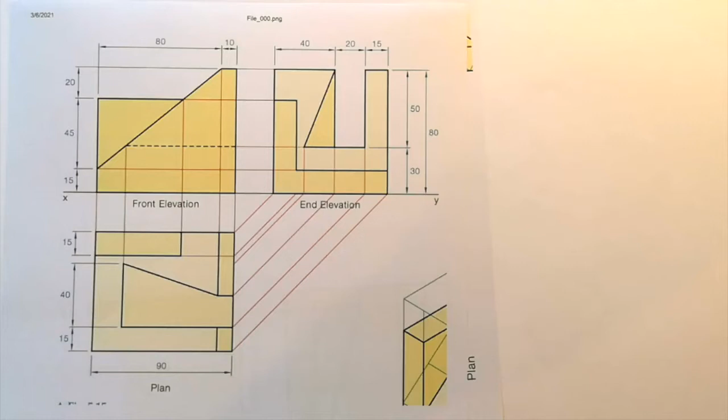Well, this drawing is a lovely little challenge for an isometric. It's got some tricky bits and some nice satisfying bits. So often you'll be given your three orthographic views. All right, load of measurements, load of bits and pieces going on.

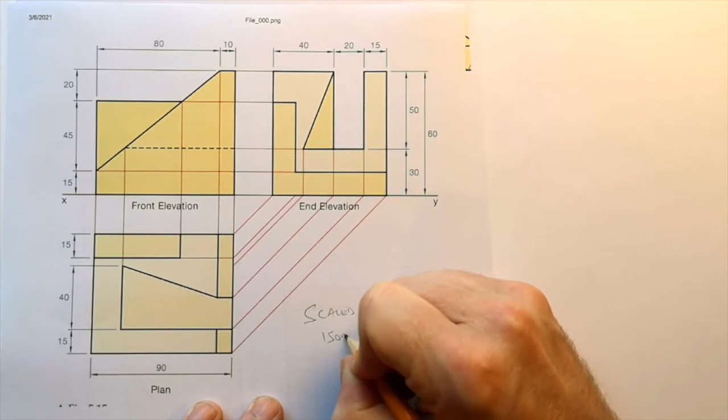So first things first, we want this as an isometric, okay, and this actually is going to be a scaled isometric. So we use the isometric scale, and I'm assuming you know what that is in this drawing. So we're going to set up our scale, set up our axes, crate it off, and go from there.

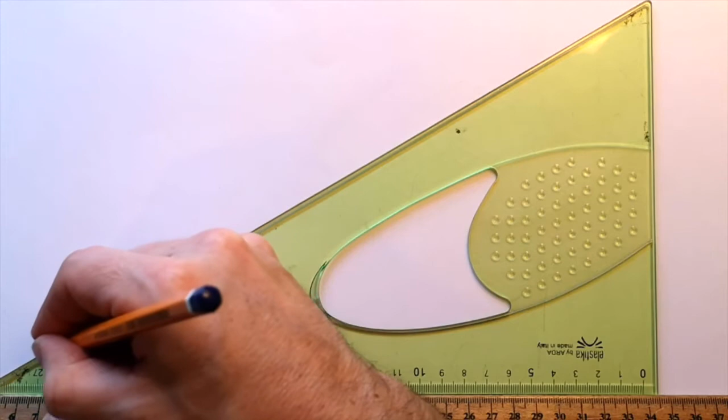Right, well, on this side of the page here, we will set up our scale. So just see, there we are. Okay, that's 30 degrees. And then we'll set this guy up. Okay, the biggest length I have in this, if I have a quick look at it, is going to be 90. So actually, I probably got over enthusiastic with my isometric scale, but that will fit in quite nicely. So that's 45 degrees for the true and 30 degrees for scaled.

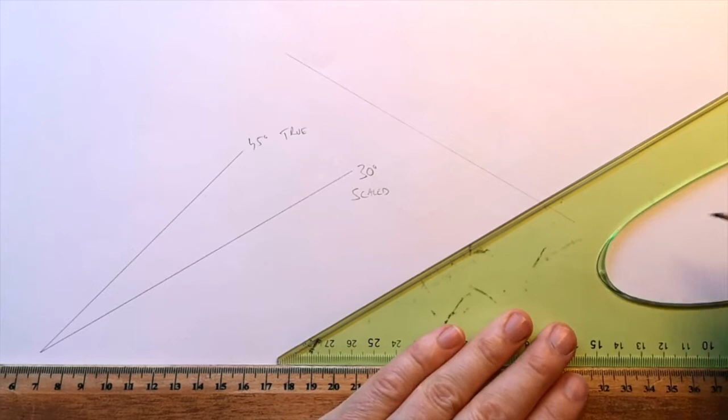Now, let's put our axes in. So we'll just see, can we squeeze these in nicely here? There we are. Okay, so this should fit in that little bit of a space, and we'll just do a bit of reorganizing to make sure we can see it.

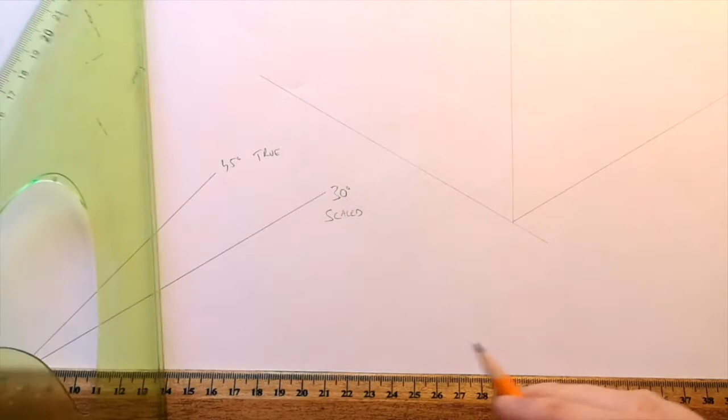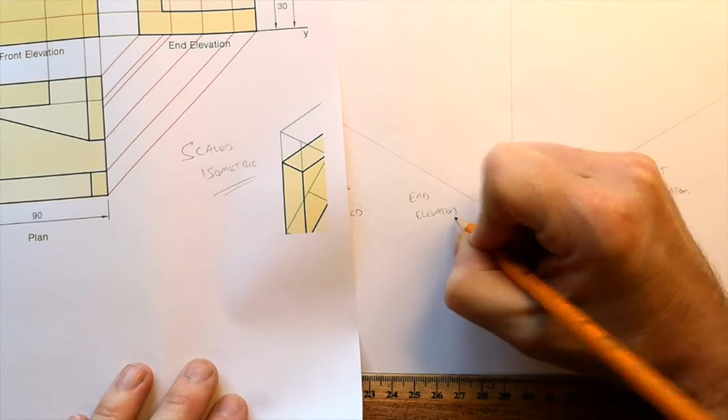Okay, so let's get our different views figured out. Well, as we're looking at this one here, this is going to be my front elevation here. And this can be my end. That's usually how we will do it. You can turn it if you have to, if it's more useful. There's not much in it in this drawing. So I'm going to leave it in this orientation.

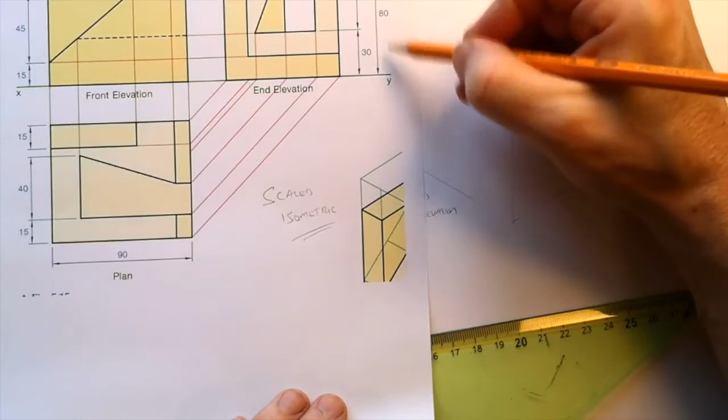Right, well, scaled 90. And we'll add 11 in a second. So let's see, we need a scaled 90. So let's measure this off. Again, I always like to number these because it saves you going back to them. I can see that it's going to be 80 tall, and adding all those up, 60, 75 across. I want to scribble that stuff down on an exam paper so you can see it. There we go. 75 and 80. So let's get those measurements in, and we'll build up our crate.

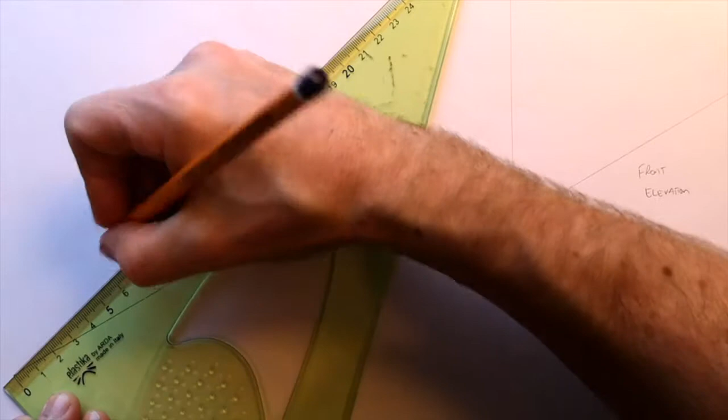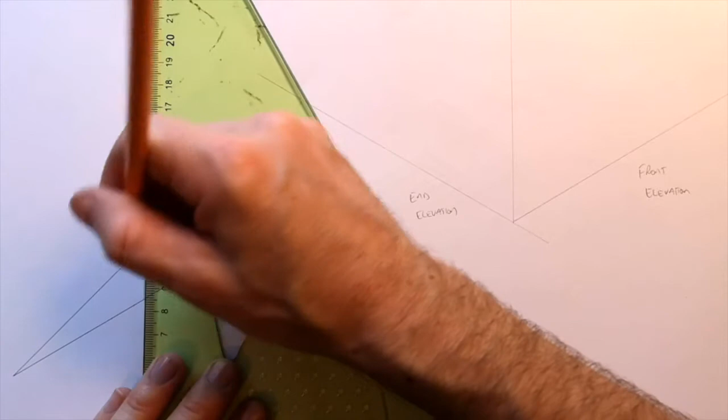Now, on a drawing like this, I always like to think about what's my little warning signs when things can go wrong. And this one is, it's not super obvious if you mixed up these ones. Okay, if it was a very long rectangular drawing or something like that, you'd see it if you made a mistake. Here you won't. So we just need to be careful that we set these views up correctly. All right, so we'll just take a little bit more time than I would on some drawings. So we'll double check. The front is 90. Okay, grand, let's get that down.

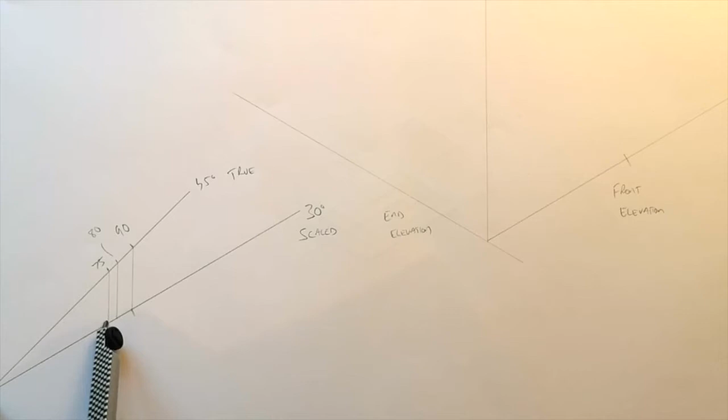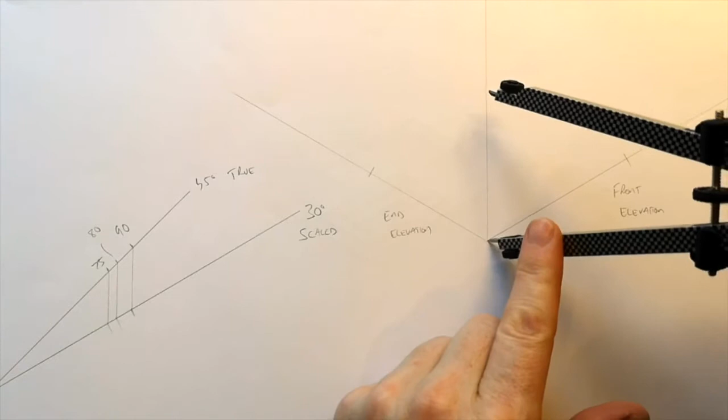All right, the end elevation is a 75. There it is there. And it's 80 high. Okay, so we'll crate this off. Now a little tip is you can rub out the rest of this axis above the highest point because it only kind of gets in the way at the top. So let's see, can we do this? Right, there we go.

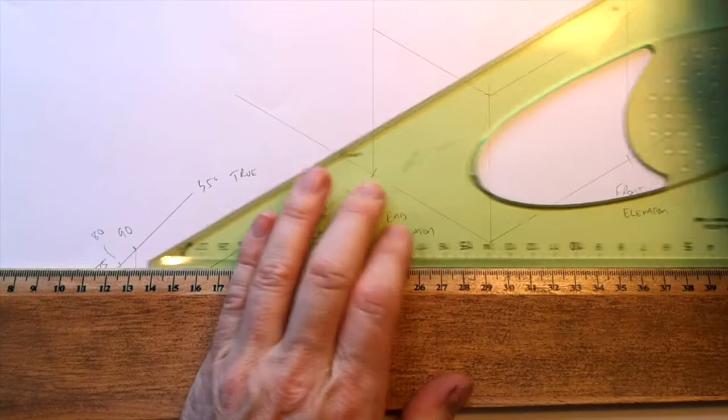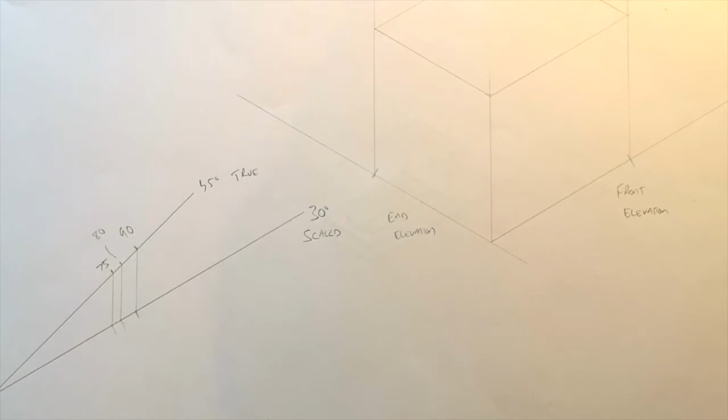Now, see the way we're using this, I'm only measuring these things once each time. We can do the whole thing there. So now we're just going to do a small bit of camera readjustment, get ourselves back on track so we can see everything as we go. Now that's a little bit better.

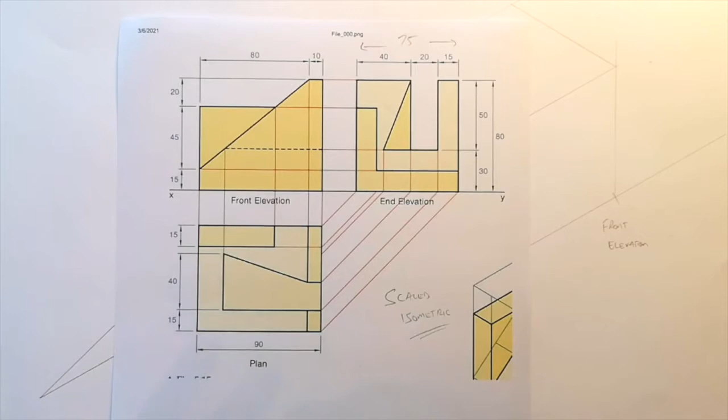Okay, so remember I said in a drawing like this, I see mistakes looming because of the shape of it if I began to turn things around. And the way I like to approach these things is rather than give myself a clap across the ear if I make a mistake, I will assume I make mistakes and I try to work around them. So what I want to do is I want to get this big triangular section drawn first, because then it'll be really obvious which way this is facing. So I need a 15 and a 10 and then we just connect the dots. So let's go and measure these guys.

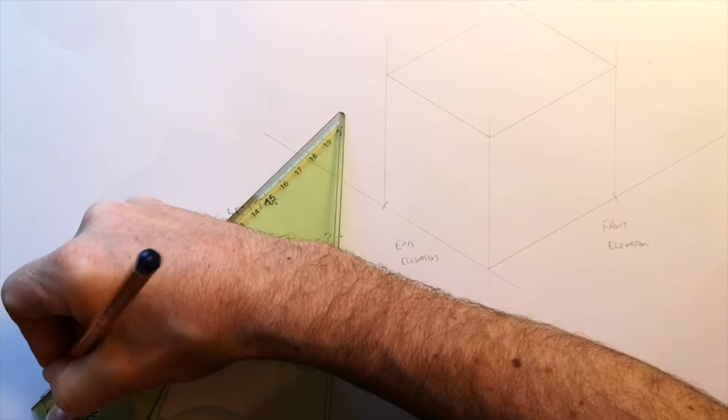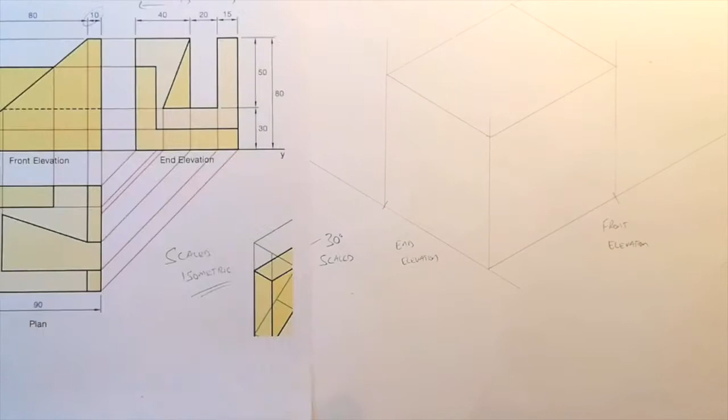There's 10 and there's 15. Okay, so we'll scale them. Now 10 is really fiddly and annoying. So for the 10 we're going to measure it, and you'll notice if you do this a bit, 10 scales to actually about 8. Alright, so 10 is, just check, this little one here at the top, so there we are. I don't really want my head to be where the camera is, but that should do us right there. Okay, so make a little mark there. And we need to come up by 15, and this of course we'll do with a compass.

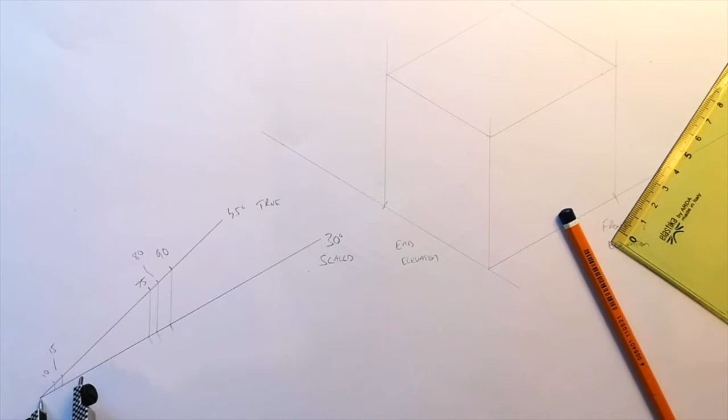And it's worth thinking, if you really hate the little measurements and they're annoying you, of course the other way to do this would have been that was 90. So I could have just used my 80 there, which in hindsight was probably a better idea. But hey, we all get it done in the end. Now, that's a lovely clean face. I'm going to put that in heavy, so it helps me orientate myself in my mind. There we go. You may be far more organized than I am and not make all these silly mistakes, but that to me is my challenge, and I know it's kind of my weakness, and once I know it, it's no big deal. We work around it.

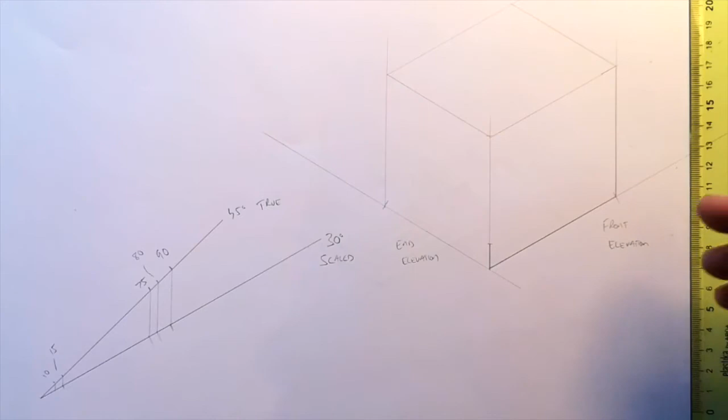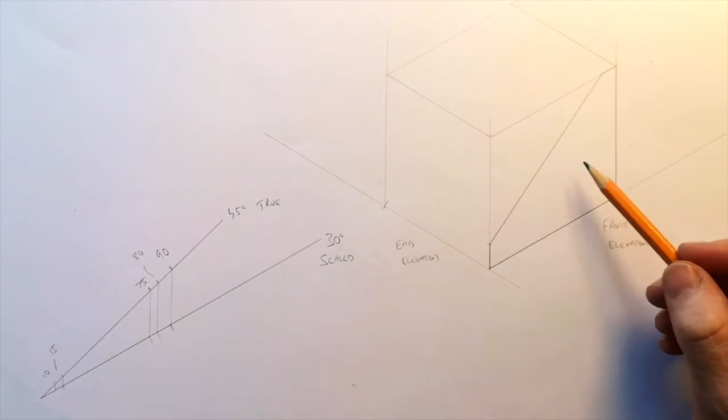Now, what about the angle? Well, whenever we do angles, okay, start to the end. What angle is that? Who knows? You can figure it out pretty easily, but I'm not really bothered. I know where it starts, I know where it ends. I'm going to connect the dots. Okay, and there we go. So now I have that edge in. Okay, this drawing is going to be much harder for me to go wrong at this stage, so this is a good move.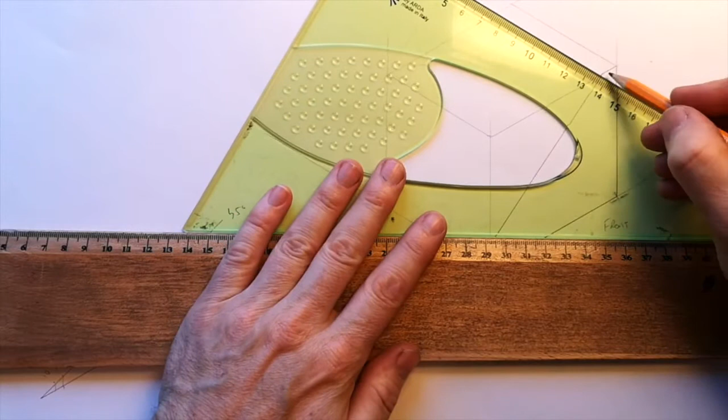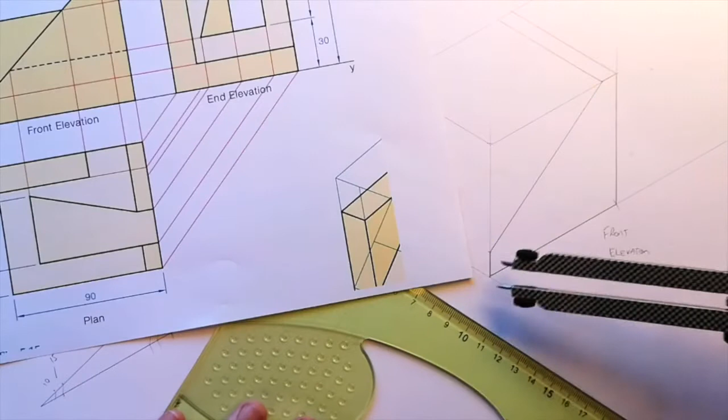Now, what do we do next? Usually I would say begin to pick away at the things that are easiest. All right, so I can see that that 10 mil line continues across the top a bit, so we'll stick that in. And the more easy things you get done, the harder stuff begins to get more manageable, and there are some tricky bits in this drawing. Now there's a gap in that, so that's why I've left it as a construction line. Let's see where else we might go. Well, if I came back by whatever that distance is, oh, there it is, 40 mil, okay, and a 15. So actually, I even have my compass set to 15 at the moment for that top one. So I'll use this again. There we go. And then we'll have to do a 40. So let's just solve this 15 for the moment.

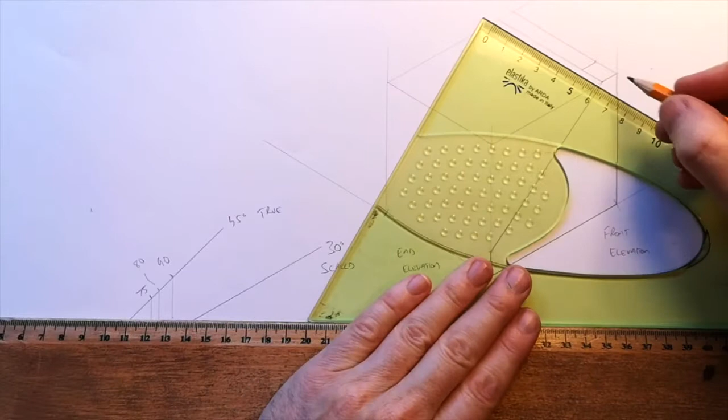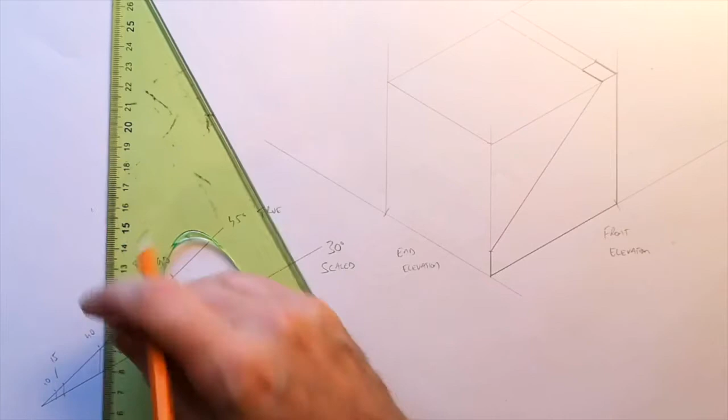And I like the ones on top because you know what you can see. You don't have to worry about, is this visible, is it hidden, where is it going to go? These ones are clearly, completely visible. So there's the top. Now we do have to add a 40 in for the other one. There it is. Remember, it doesn't actually matter what order you do these in. Just make your life easy. But if you're trying to figure out where to go next, just pick something that looks manageable and do it. There's my 40. That comes in from there. Again, I'm only doing one because I can just project it across.

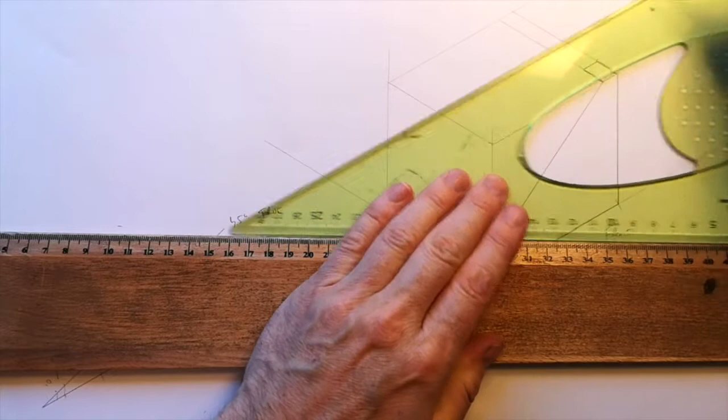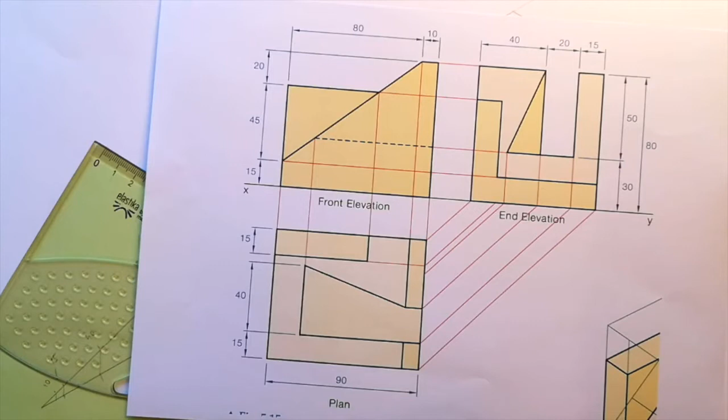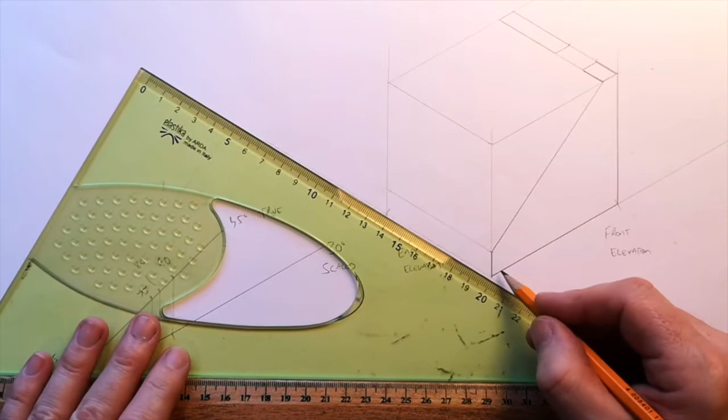Okay, grand. So there's my top two pieces. This is coming together. Well, where will we go next? Well, it's kind of up to you, but again, the next easiest thing that I would see is this L in the end elevation. Okay, that looks fairly handy. I have the 15 already. Do I know this height? And there it is, 15 again. Okay, so let's see, can we get that done? That just goes across here, so that's easy. Project across. And then we need a 15. So we'll go back and get this guy.

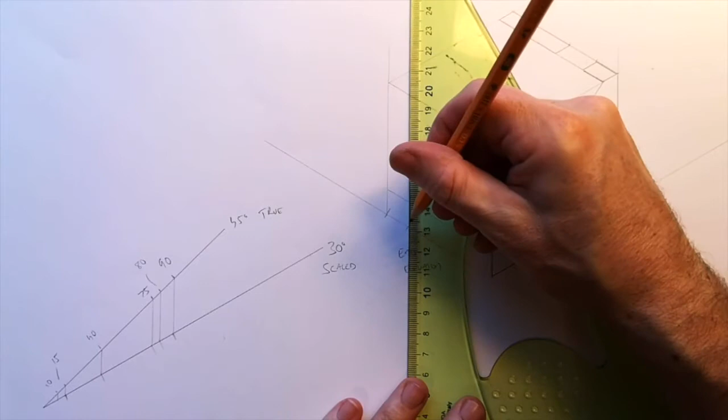I always draw it just on the page to make sure I'm actually contacting correctly. And you can measure off any of the axes, but I'll do it there. That goes up like that. Now it doesn't go the whole height, so again, let's go back and have a look at our drawing. And that is going to go up by 60. Right, add this to our scale.

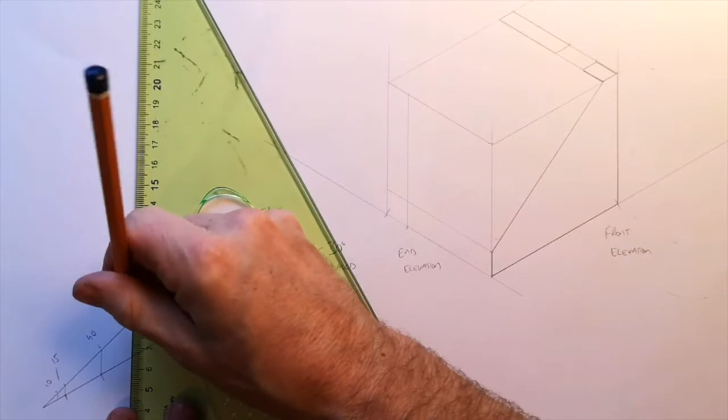And you see I could of course have added a scale of 45 to the 15 that I have, but the bigger it is, the lower the margin for error. So that's why I'll always go with the bigger measurement where I can. Now let's pop that in there. So again, we can put this guy in heavy.

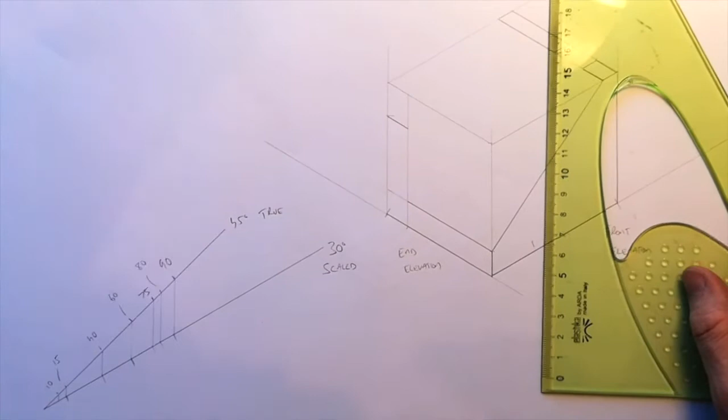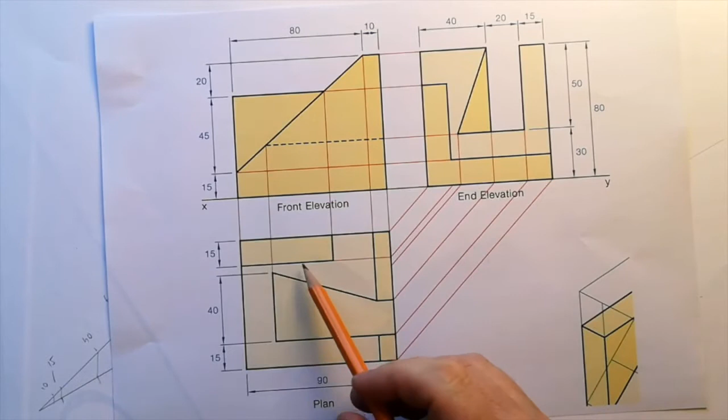Okay, try to avoid little double lines like that there. Now, where next? What have we got? So, I could come back until this point, but do I know where this point is? That's not super obvious yet. Okay, that looks hard, so let's not do it.

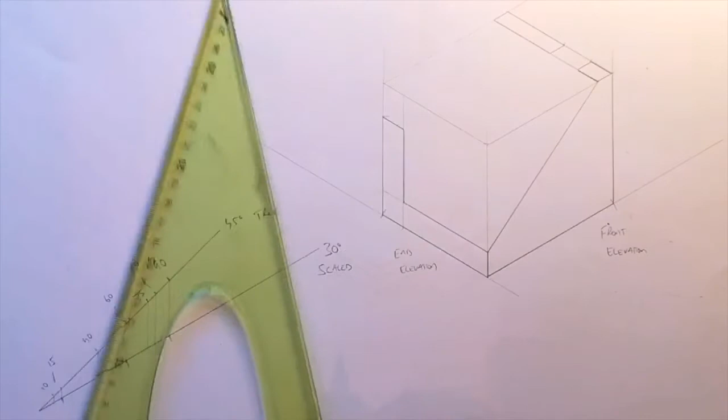What else can I begin to put together? I wouldn't mind knowing where some of these points are. So maybe we might try and see where this line that goes across is. So we know it's 30 up. Right. Let's go do that. 30 scale, and off we go.

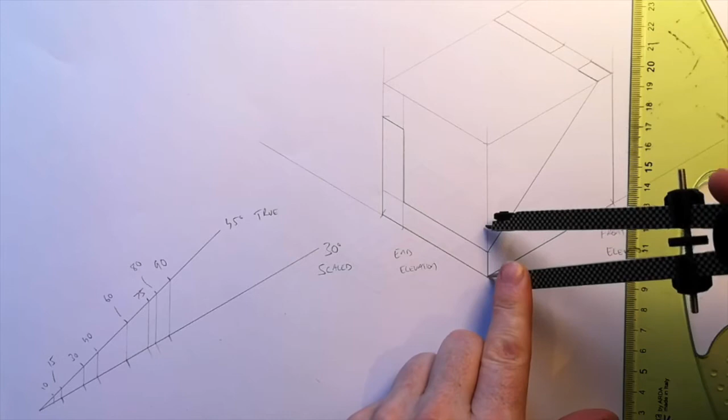Now this one is actually slightly trickier than it seems. So we'll measure our 30 up. But of course that line is not there, it's on the surface. So we need to bring it back to the surface. And here's how we do that. We simply project back until we hit the slope. Then at the slope, we can project across. So that is where that line is there.

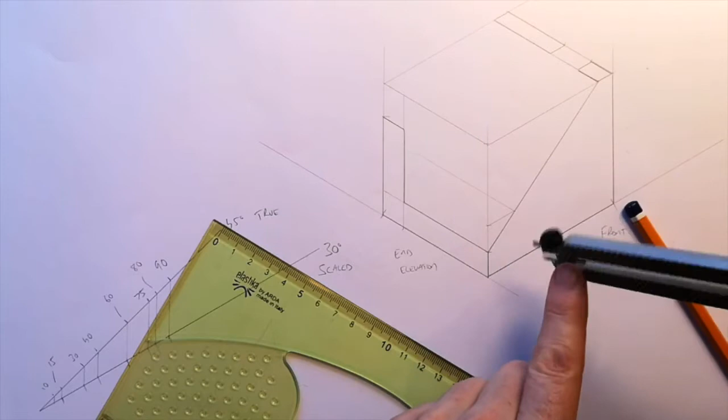Now what do we know about it? So this edge is along there. It's 40 long, and look, 15 out from the edge. Our good old friend. Now, sometimes you can actually just save yourself a bit of hassle by measuring off the drawing itself. So it's 15 back from the edge. I'm going to measure this here. Actually, I had it up the top even. And here's what we're going to do.

In this drawing, these two lines are parallel. And if they're parallel in this, they're parallel in the isometric. So I can actually use that fact to just come from here. See, I actually didn't even need that 15 measurement because I could have come down from here. We'll just double check that again. There we go.

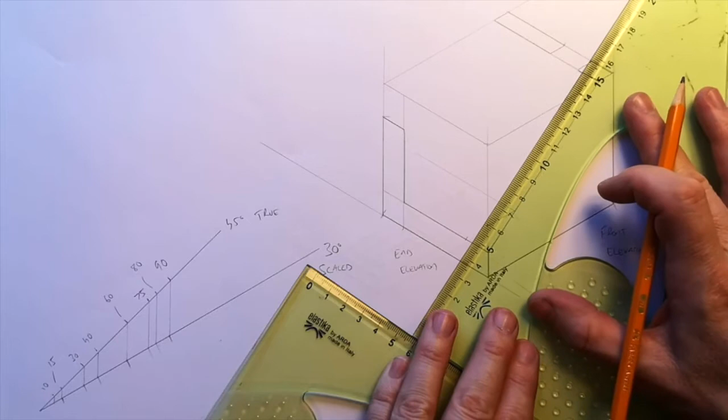Now, you see there's a small bit of error there, and this is really just down to our compass. So this is one of the reasons I like to project around where I can, because at least you're not adding up errors from different sources. If that 15 was out at the top, it'd be consistently out. So we'll put that line in heavy there.

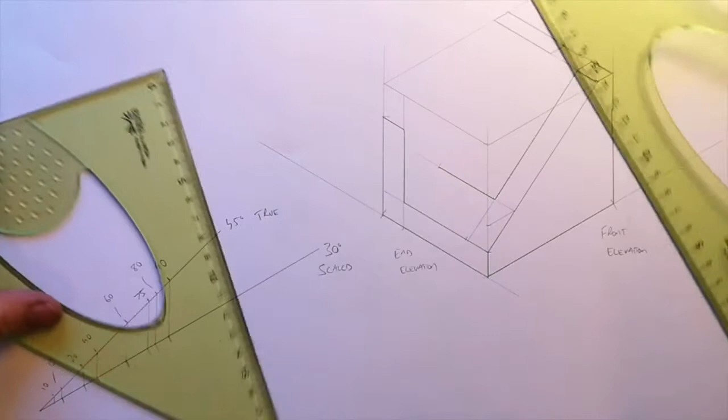This goes across by 40. I think I have 40 measured here. There it is there. Across by 40, and that's what we have. All right. So now this is coming together a little bit.

So if you're wondering why this is going very blue as we do all our drawing, it is because the sun is setting and the color balance of the different lights is changing.

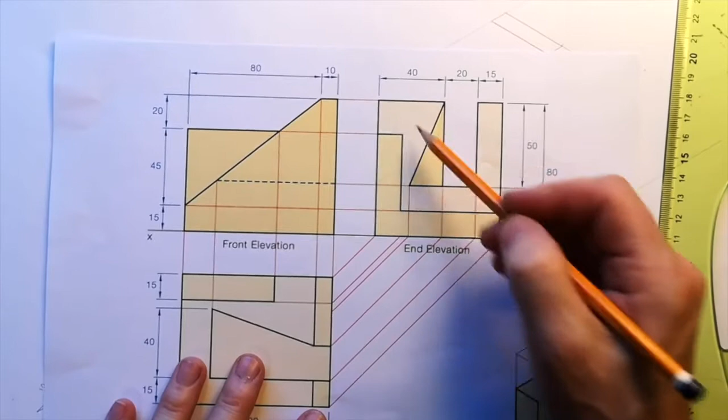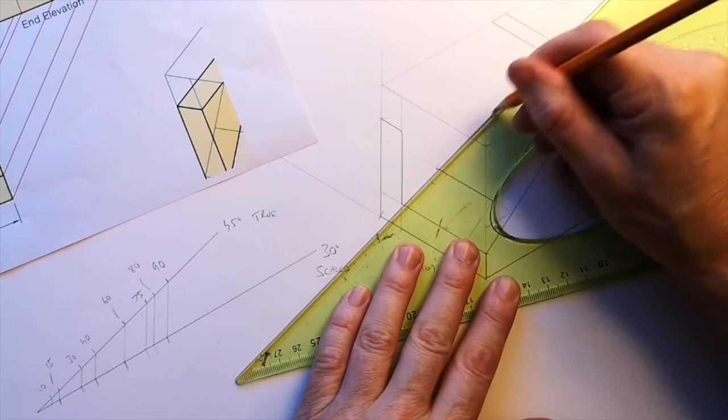Now, right, diagonal lines are typically awkward, but this one is nice because this line connects from there to the top surface here. See it down again at the bottom, there to there, which in real life is there to there. So that's where it does get a little bit funkier, but if you just think of it as where does it start, where does it end? And there we have that piece.

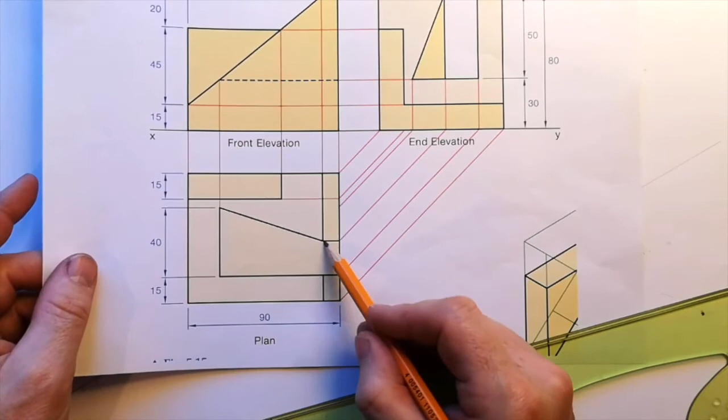Now, what else can we do? What happens at the bottom here? Now, that's a flat surface there going across. This end projects down to there, but this is flat and it's going back along this edge, which is awkward, so it's not going at this angle. So we need to think on that a little bit. What do we know about it? It's parallel to this guy. Okay, so let's drop some projections down here, begin to see what we can figure out.

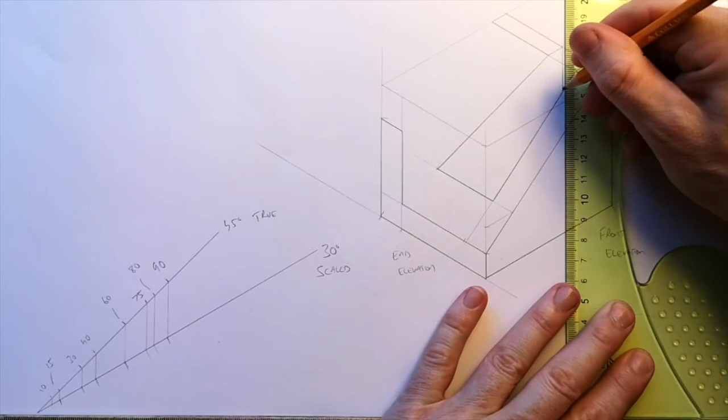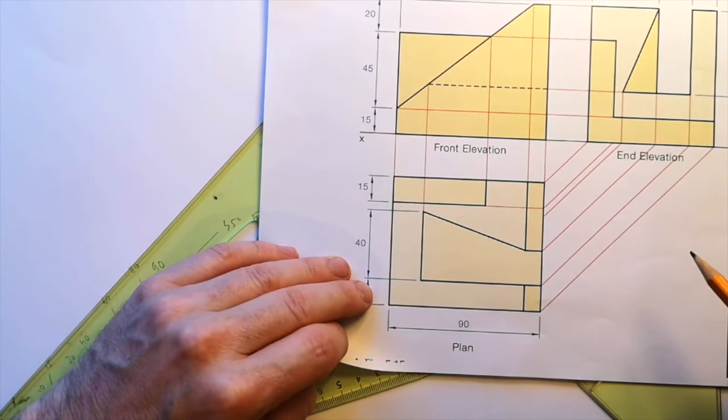Now this back one's going to be pretty obvious. I can see that's going to stop there. That goes down to there. And this one, I'm going to do this as a parallel. Okay, and here's how I know it's a parallel. When I see it in the plan, that's a vertical face, which means the bottom line is parallel to the top line. Is it? No, it's not, because it's a slope. Okay, so look, that's just a weird problem for the moment, and we're going to come back to that one. Again, we'll solve the harder problems along the way.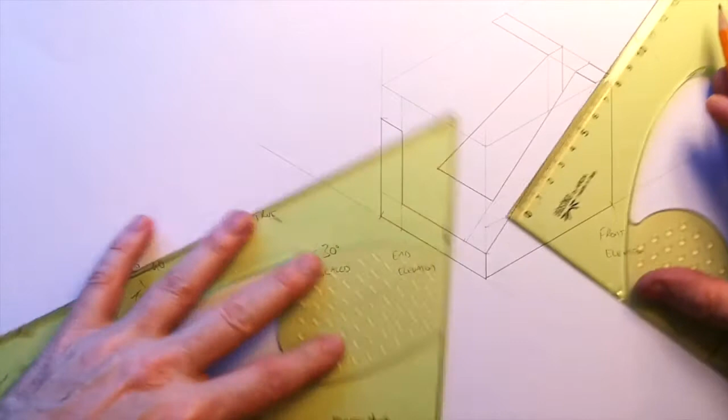For the moment, though, let's get this little edge. Now, this little edge I do know is part of the surface, so it's going to be parallel to this one. So we'll do our parallels there. There we are. And equally, you see, I could have just connected top to the bottom. There's different ways you can do these things. So we project down like that. I can see it's going to intersect with this, so that's why I didn't go the whole way down.

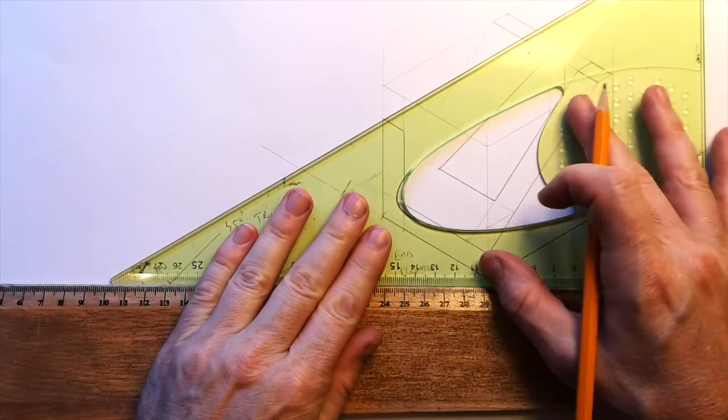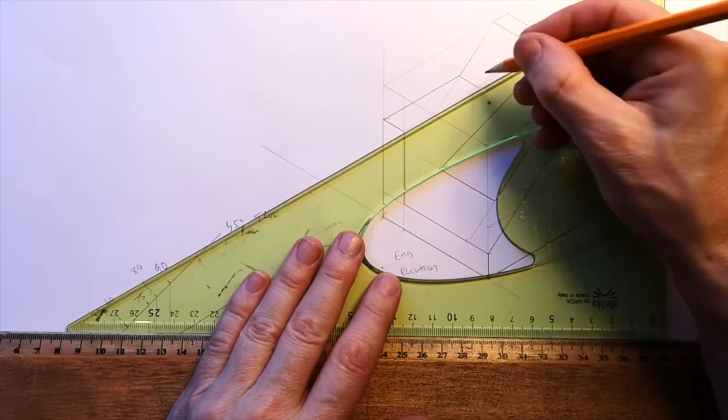So this is horizontal in real life. It goes back to there till it meets the surface, and then that's heavy. Of course, that's a little rectangle on the top, so it goes back like that, across from here, and we just go back and complete it. Now, what do we have left? There's definitely something going on here, that's for sure. So let's see, can we solve that problem before we go down to our friend down here?

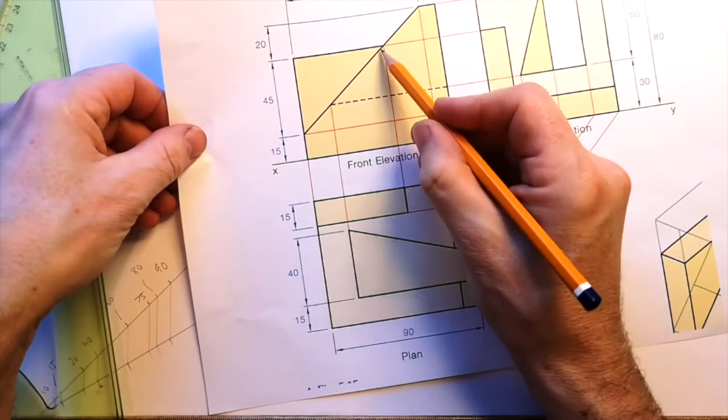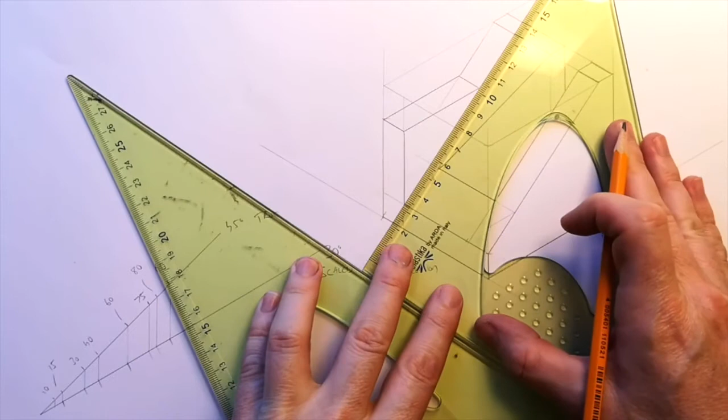That's all one surface. So this is all one surface. What we need to find is the edge along there, the edge inside that, which is just parallel to this, which comes from there. Actually, it's just going to be there to there, really, isn't it? Okay, connect the edges. Now, if you're unsure about this, check your parallels. It should be parallel to this. Yes, it is. Okay, we had the start and the end, but you can do a quick cross-check, and now we have it.

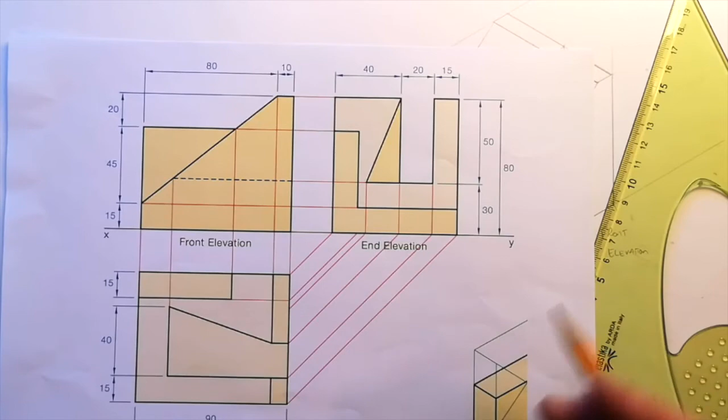Okay, so this final little line on the bottom. Now, like I said, it was tempting to think that it'll be parallel to this, but of course it's not, because we can see that it's going off at a different angle. So what do we need to do? Well, if we can't do parallels, we need to do starting and finishing. So let's figure out where this corner here is. Okay, it does straighten out at the back, but if I can find this point, I'm golden.

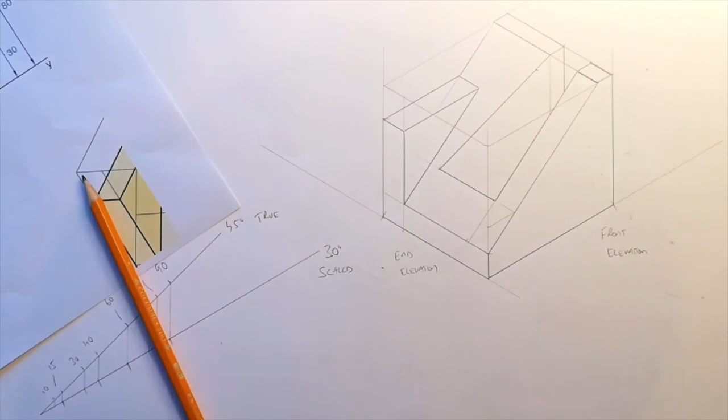Well, I'm going to come down from here, I'm going to come across from there, and I'm going to see, can I box it off? Well, this might sound a tiny bit complicated. It's actually fairly fast to do. So I know that that edge is down from there, because it's really down from there, but come across, come down. I know that it is on this flat surface, so it's across from that height. And now what I can do is I can send a line back. So what I've just done now, I've created this line on the ground.

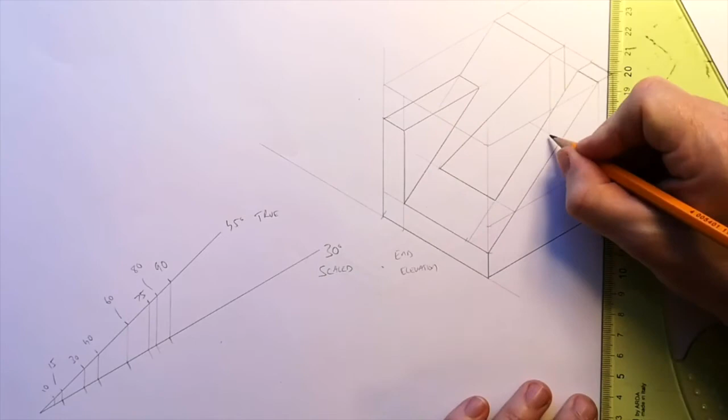So I still need to figure out where that point is. Well, it's straight down from here. So let's come straight down from this edge to where it meets that point, and there is where this guy joins up to. And now you can see it. That's going to be the line. So of course, that's the bit that's heavy. I'll just finish off the construction line, but that's the bit that's heavy on it.

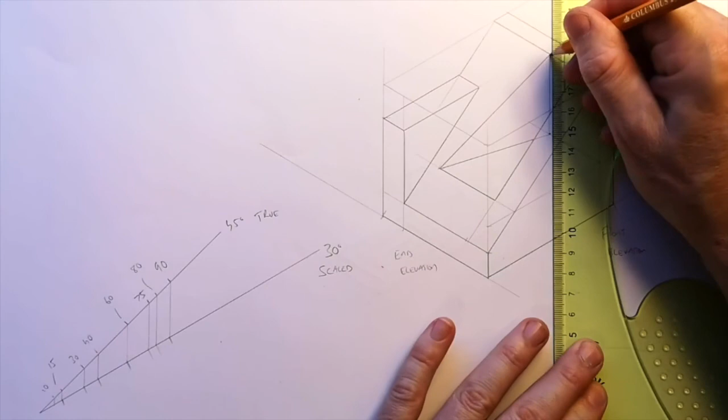Now, at this stage, we're looking pretty damn good. Let's just check our lines. That could be a touch heavier. Just pop it in there. And all of our surfaces seem to be in there. And now we have it. Quite a satisfying little drawing. A little bit tricky on that one. People often get tripped up on it. But you see, we just figured out it's straight down from there. It's crossed down and back across that surface. And then we have it.